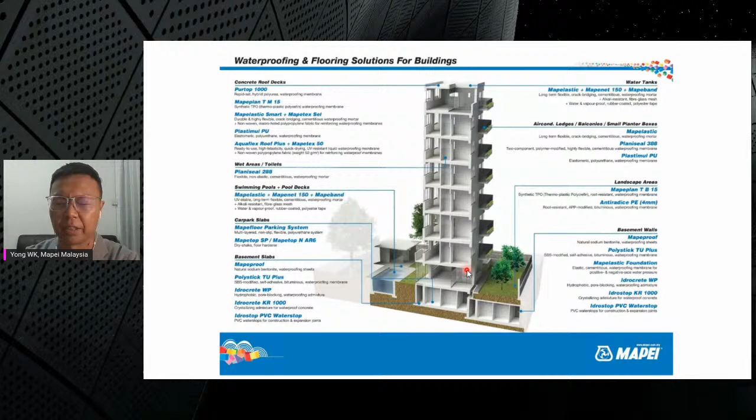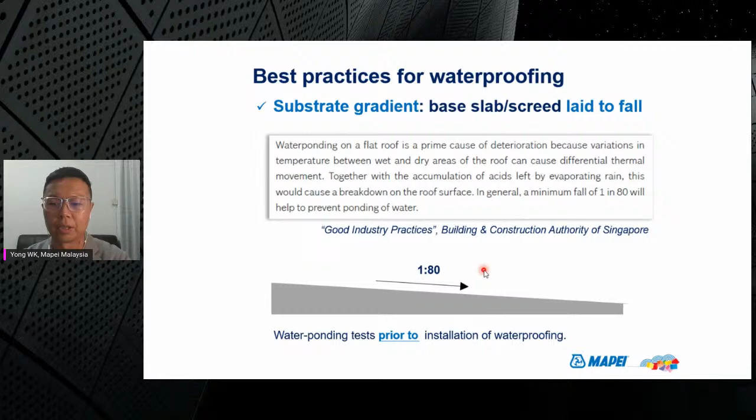So let's take a look at the number one criterion that we need to observe, which is the substrate gradient: the base slab or the screed shall be laid to fall. According to the good industry practice by BCA of Singapore, the roof shall be cast at 1:80. With this gradient, it should be sufficient for the water to flow to the nearest outlets. If this is not so practical in Malaysia, at least we should observe a minimum of 1:120 in our context. What we can do is conduct a water ponding test prior to any waterproofing installation to ensure that there are no water depressions on the substrate. This is a very important first step.

The second step is to look into the substrate condition when using a fully adhered system, meaning a fully bonded system. The substrate must be fully cured, sound, and strong. It should be free of laitance, dirt, dust, oil, grease, coatings, or any contaminants that may affect the adhesion. I always use this analogy: if you're going to stick cellophane tape onto a dusty table, will it stick? The answer is no. So for any waterproofing that we are going to bond onto a substrate, it should be free of laitance, dirt or any dust. This is very important.

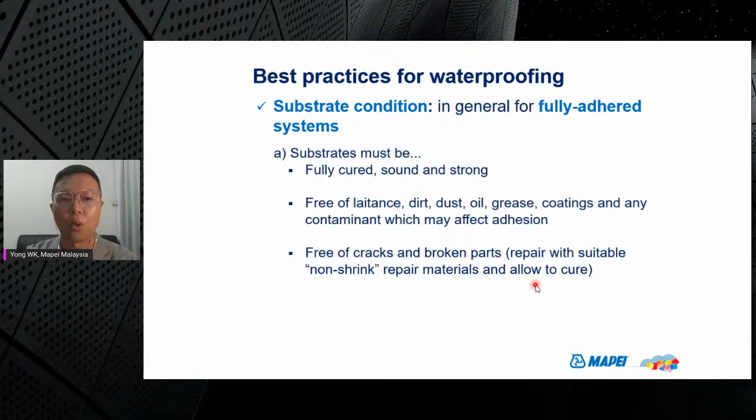We must also ensure that the substrate is free of cracks and broken parts. It should be repaired with suitable non-shrink repair materials. And the keyword here is allow it to cure properly before we apply the waterproofing on top. This is very, very important.

Subsequently, we also need to ensure that waterproofing materials with very high mechanical properties, for example, our Purtop system or a Mapefloor car park system, which require very stringent surface preparation, follow the strict manufacturer recommendations.

For instance, from the diagram below, you can see that for certain cases, we may even need to do captive shot blasting, and on the texture of the surface, we can see here it creates a mechanical key for the waterproofing or the flooring system to bond onto the substrate. This is to ensure that the waterproofing is applied to all this area and fully bonded onto the substrate.

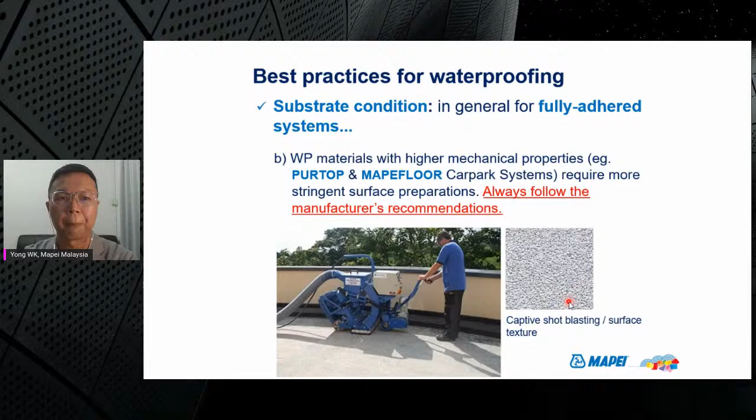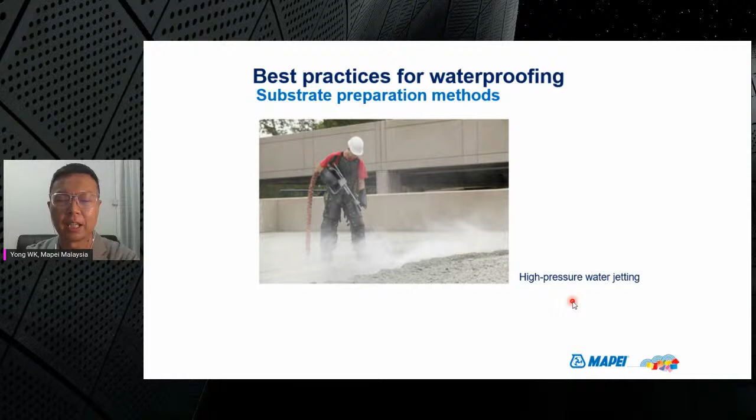And in certain cases, for highly contaminated substrates, we should use high pressure water jetting to clean off all the contaminants that may affect the adherence of the waterproofing onto the substrate.

For non-structural cracks, what we can do is cut a V-groove to 25 mm deep, remove all the loose debris and reprofile them with our epoxy putty, for example, our Adesilex PG2 TG.

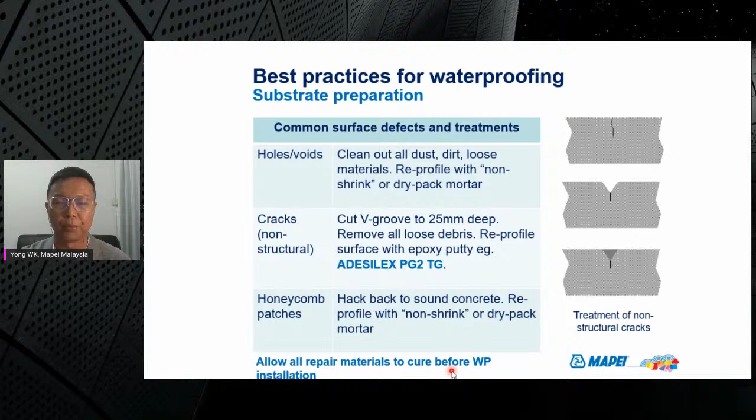For honeycomb patches, we can hack back to the sound concrete and then reprofile them with non-shrink or dry pack mortar. All these repair materials have to be properly cured before the waterproofing installation. This is a very important step that we need to take into consideration.

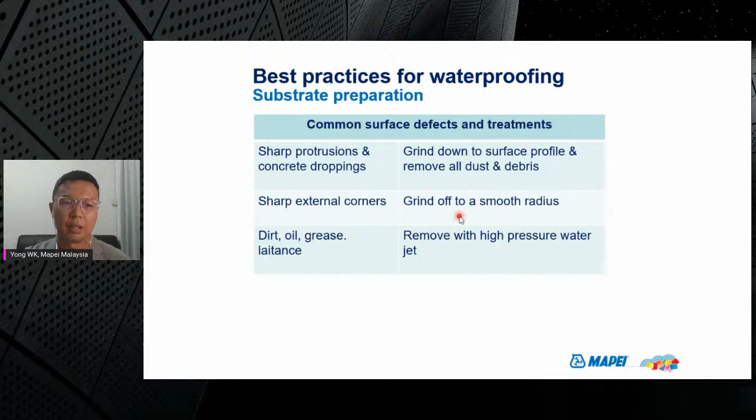For sharp protrusions and concrete droppings, we grind down to the surface profile and remove all the dust and debris. For sharp external corners, grind off to a smooth radius. For dirt, oil, grease, and laitance, as in the pictures we showed earlier, we can remove it with a high pressure water jet.

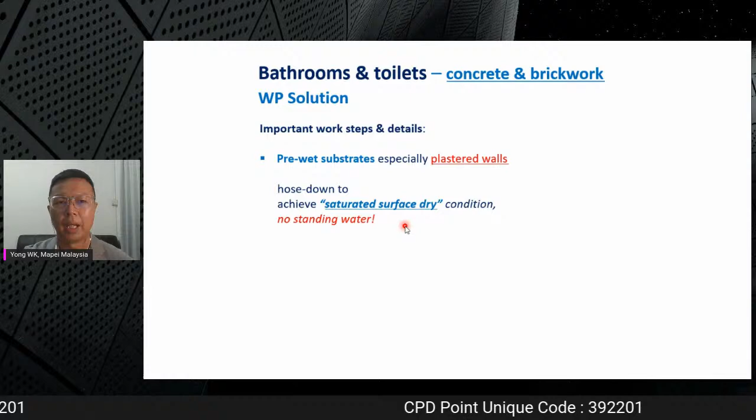For instance, for a bathroom and toilet with concrete or brick wall substrates, what we need to pay attention to is to pre-wet the substrate, especially the plaster wall, and then hose down to achieve a saturated surface dry condition.

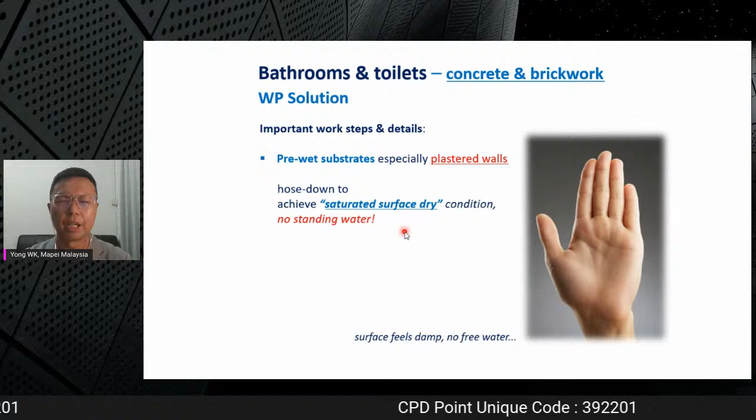What is a saturated surface dry condition, or what we call the SSD condition? That means the surface feels damp, but there is no free water or standing water on top. So after we apply the cementitious waterproofing onto it, it will not be sucked away by the substrate, and it will not interfere with the adherence of the waterproofing onto the substrate.

Next, on the treatment of internal corners, option one: install 25 by 25 mm cement mortar angle fillets. What we can do is mix latex into a 1:3 cement sand mortar to form these angle fillets.

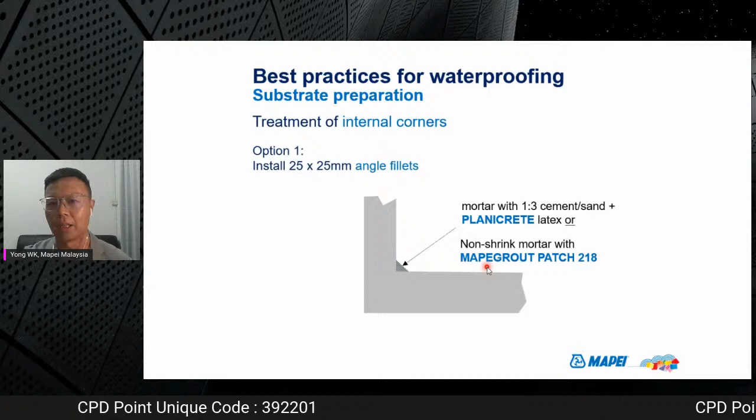The reason we do angle fillets is that we want a smooth radius of the waterproofing on the upturn areas, so that the waterproofing will not crack there if you have sharp corners. Optionally, we can use our non-shrink mortar, like our Mapegrout Patch 218, to fill up this joint here.

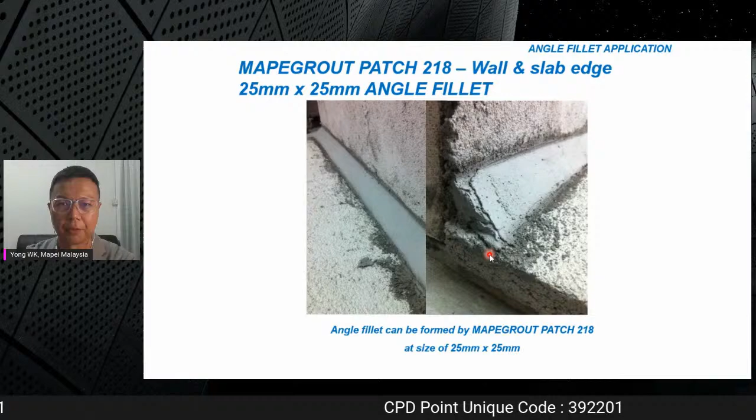So this is how the angle fillet looks. It can be formed by using our Mapegrout Patch 218 to form these 25 by 25 triangular angle fillets. Option 2, you can use our range of Mapeband.

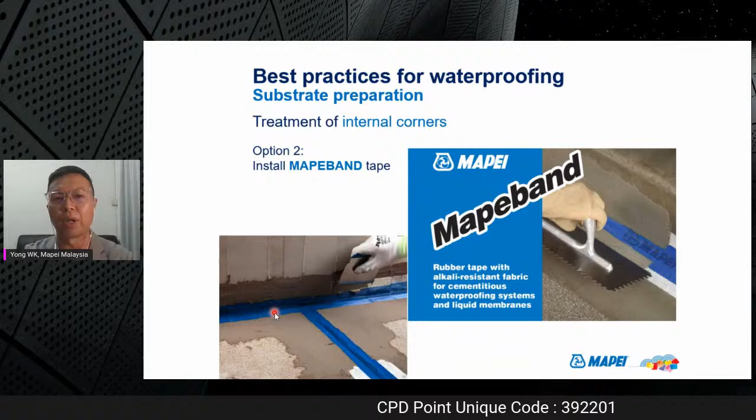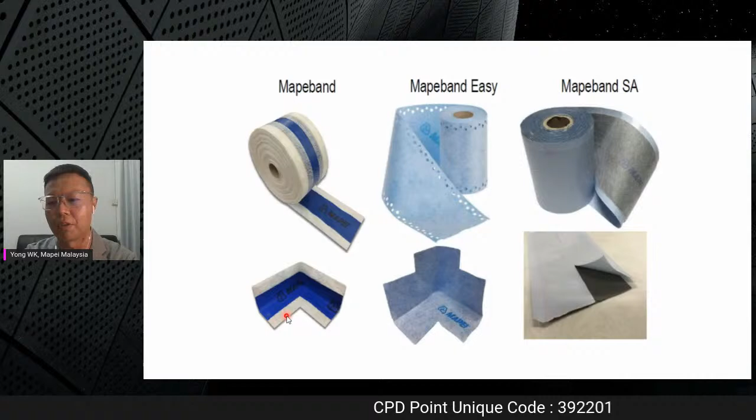So the Mapeband, with very stretchable materials, after you apply this onto the angle fillets, will actually make the joints and sharp corners watertight right away. We have a range of Mapeband, which is Mapeband Easy or Mapeband SA, used in different scenarios. So this is how it looks. You can use Mapeband Easy, or we can use Mapeband SA with a self-adhesive.

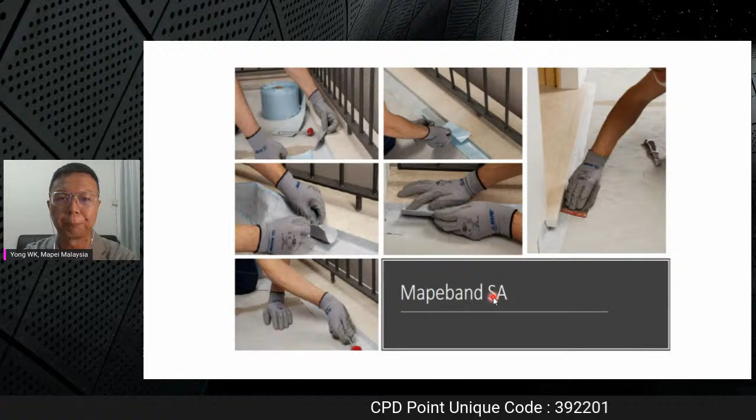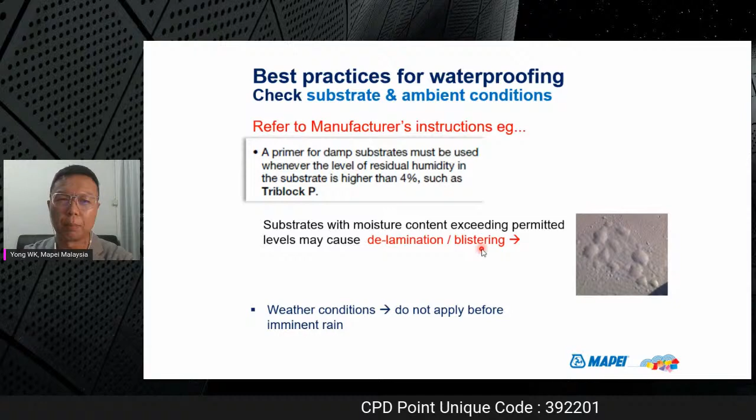For best practices for substrate conditions or ambient conditions, always refer to the manufacturer's instructions. For instance, if the substrate is very damp with a very high moisture content exceeding the permitted level, it will cause delamination or blistering, like what you can see in the picture here. So we can use a primer to solve this issue, or always check the substrate condition, the moisture content inside the substrate. If the weather is going to rain, we don't apply the waterproofing. So observe this.

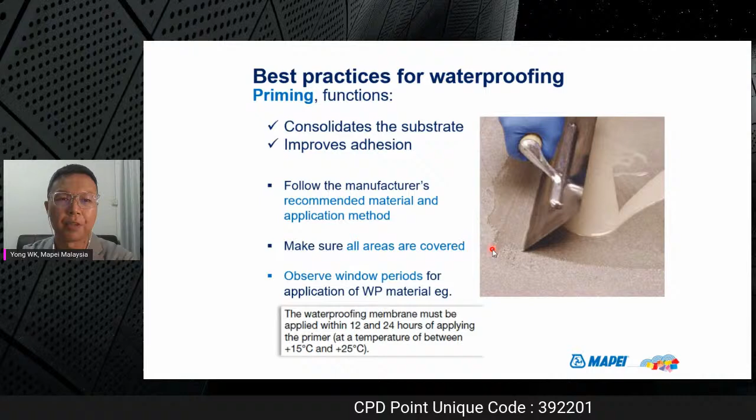Oftentimes we recommend a lot of primers, primer SN or primer MT or things like that. So what is the function of this primer? It is used to consolidate the substrate and also to improve the adhesion of the waterproofing to the substrate. Always follow the manufacturer's recommended materials and application method, make sure all these areas are covered, and observe the window periods for the application of the waterproofing material.

For instance, the waterproofing membrane is applied, as recommended in our data sheets, 12 to 24 hours after applying the primer. If this surpasses 24 hours, we need to reapply it, because it has already surpassed the window period.

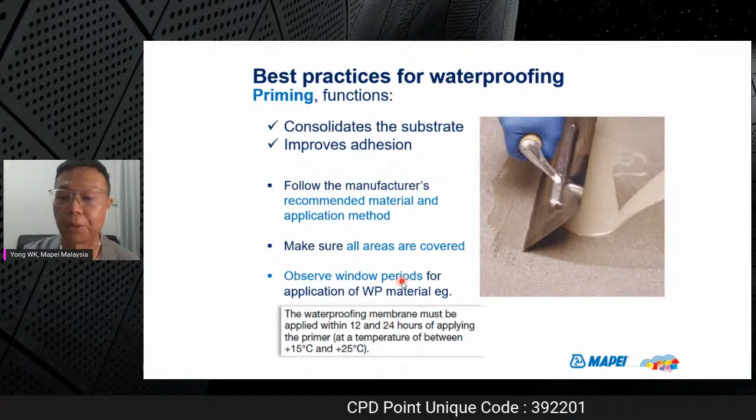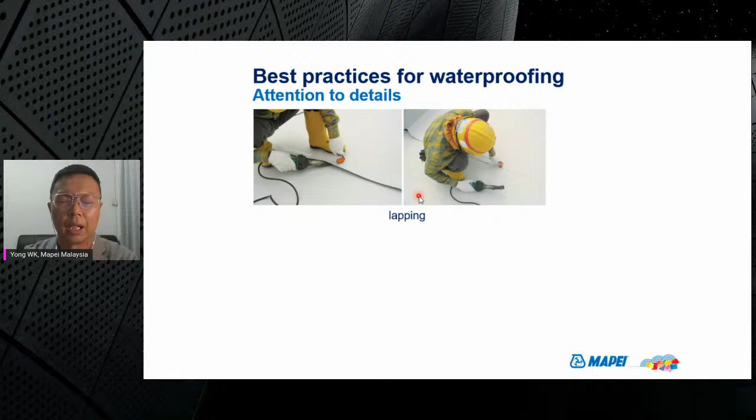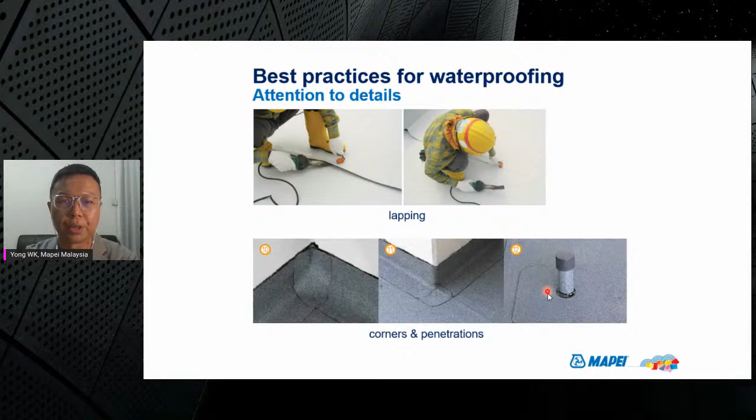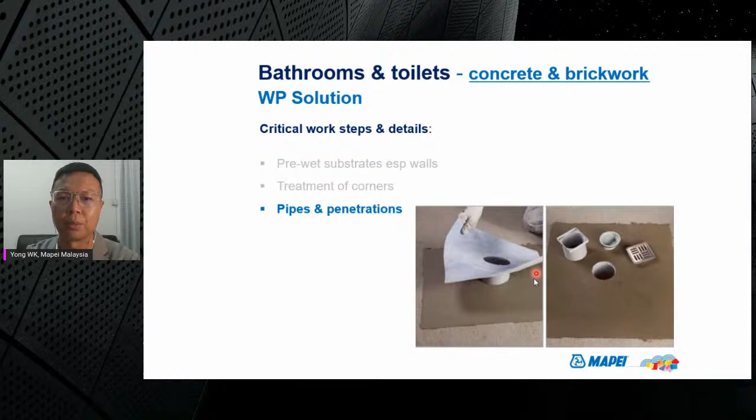For roll-form membranes, like our torch-on membrane, TPO membrane or PVC membrane, we need to pay attention to all the detailing, especially the lapping, to ensure no water seeps through the laps. All the corners and pipe penetrations have to be taken care of to ensure the watertightness of the waterproofing membrane. For pipe penetrations, at MAPEI we have something called drain vertical to ensure the watertightness of the floor trap here. Later, I'll show you the full details of this.

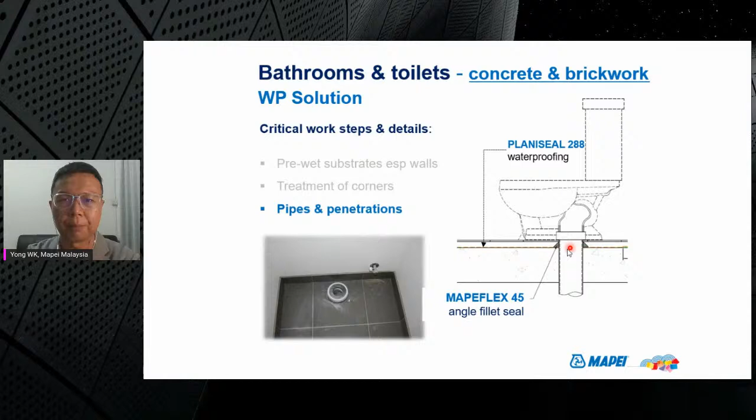For some WC areas, we can treat it with sealants around the circumference of the floor trap or the WC area. These are the simple detailings we need to observe for toilets, especially waterproofing on the cementitious. This is the cementitious waterproofing: our Planiseal 288 or Planiseal 2A or even our Mapelastic.

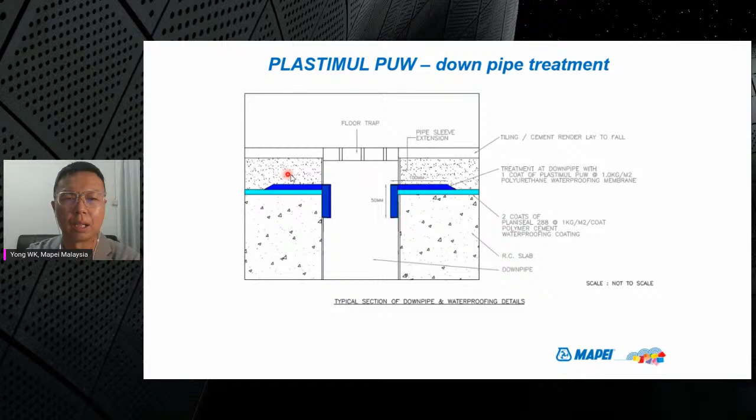After that, we need to apply the PLASTIMUL PUW, a liquid-applied waterproofing coating, over it, with a downturn of 50 mm and about 75 to 100 mm around the circumference of the floor traps. This ensures these areas have been taken care of for watertightness at the floor trap. In actual conditions, you can see it has to be done this way.

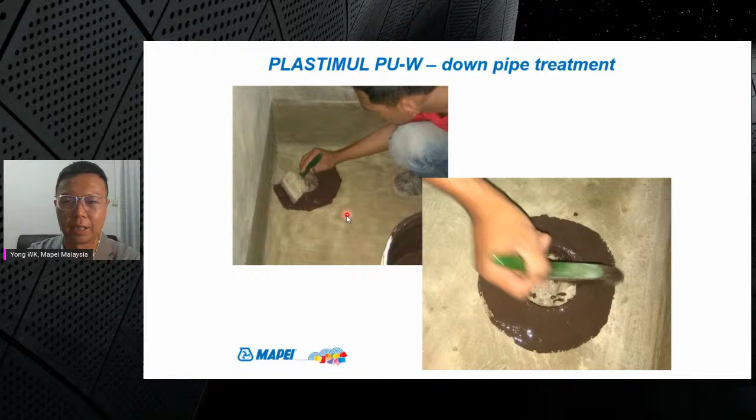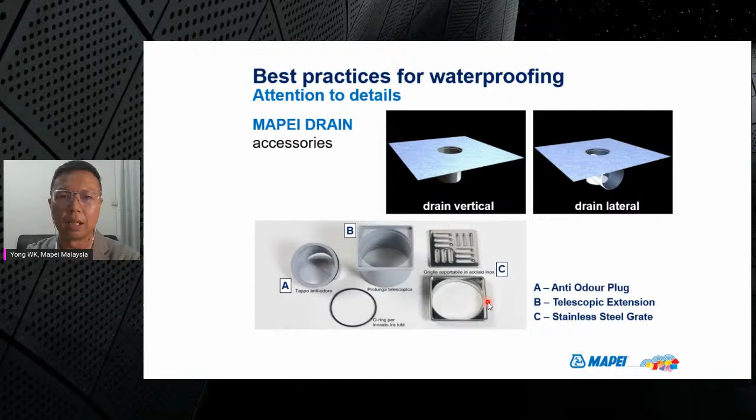Like I said earlier, MAPEI has a range called drain vertical, and also drain lateral. The whole set includes anti-odor plugs and a pipe sleeve that you can cut to suit the screeding level you need. The box also comes with a stainless steel grating to take care of the floor trap area. So this is one whole set available to the industry.

We also need to pay attention to all this detailing, especially where we apply the tuck-in on the upturns and seal it off with sealants, or where we need to do certain lappings. Even for the TPO or PVC membrane, flashings need to be taken care of. All these detailings are available to share with consultants and architects in the industry, so always check with us. We can share the standard detailings we have for each product, since each product has different detailings to observe.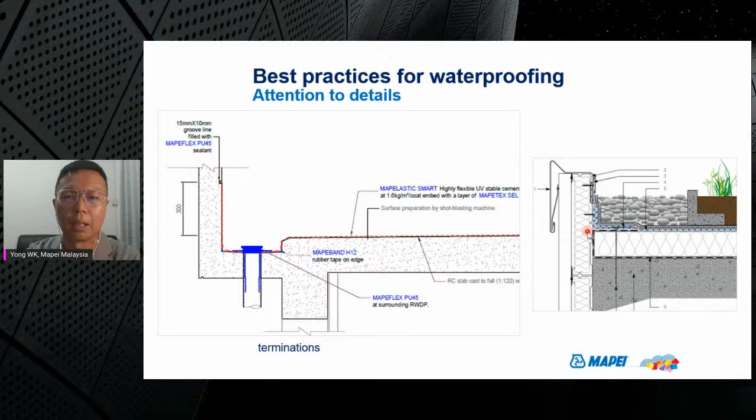And also, we need to respect and treat all the joints. For example, in this case, this is actually a structural expansion joint. What we can do is install a Mapeband TPE tape. Basically, it is tape that we add to ensure the water tightness of the expansion joint. Okay, so we can use this.

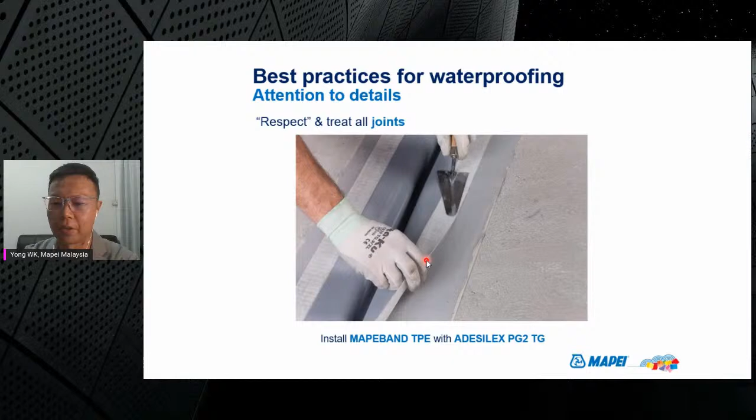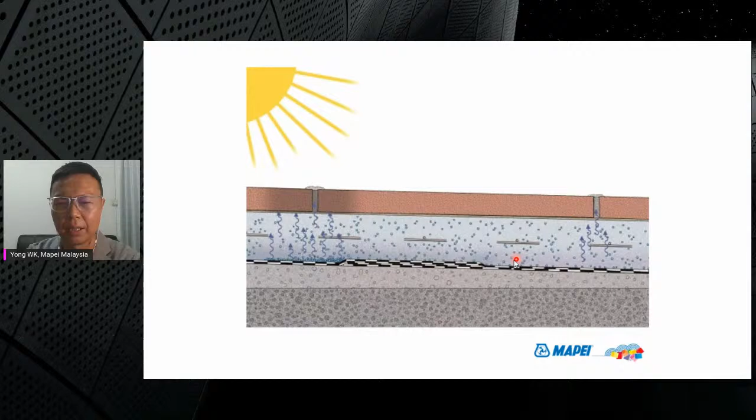Right. A lot of times we hear owners and architects complaining about this. This is actually a phenomenon called efflorescence on the substrate, especially the tile surface. For instance, this is a waterproofing layer, and this is a screed layer. What happens is that if you waterproof the layers on the substrate directly, then screed over it, and then tile over on top, the rainwater is still able to reach down to the substrate. In this case, this is the screed, and it will react with the screed to form efflorescence on top of the surface, and it will look very ugly.

So how do we actually prevent this? We apply the waterproofing layers directly onto the screed. We can also do one layer on the substrate, to ensure that these waterproofing layers serve as protection against the water coming in contact with the screed to form the efflorescence. So this is a very important step, and then we can directly use our tile adhesive to tile over it, and this will ensure that the efflorescence phenomenon won't happen, right?

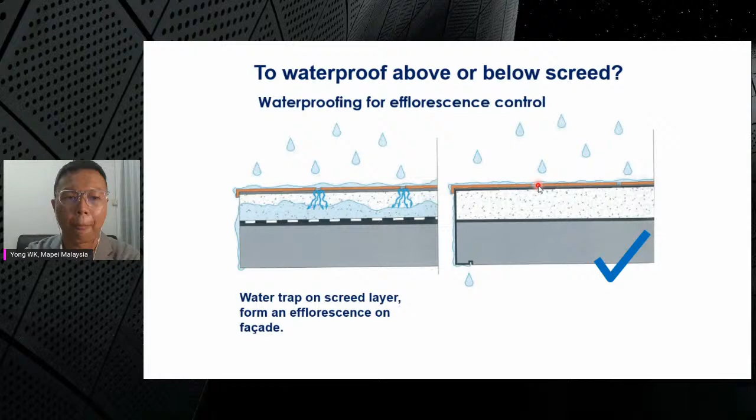So last but not least, we should appoint experienced and competent applicators. Always check with us on the project references, because this is very important. We always believe that if you have world-class products but lousy applicators, you will never get a successful waterproofing system, right? So always check who their project teams are and whether they have done any relevant jobs with these products, which are very special products, especially the spray-on polyurea system that we have in our range. And also check whether they have special equipment and tools to apply the waterproofing system.

Right. For instance, this one is a pure polyurea system, right? So they need to use very special equipment and tools, a spray-on machine, to spray the waterproofing membrane. And also check the financial strength of the applicators. Make sure that they are not a $1 or $2 company, right? They are here to stay and to serve, because they will carry the liabilities of 10 years on the workmanship.

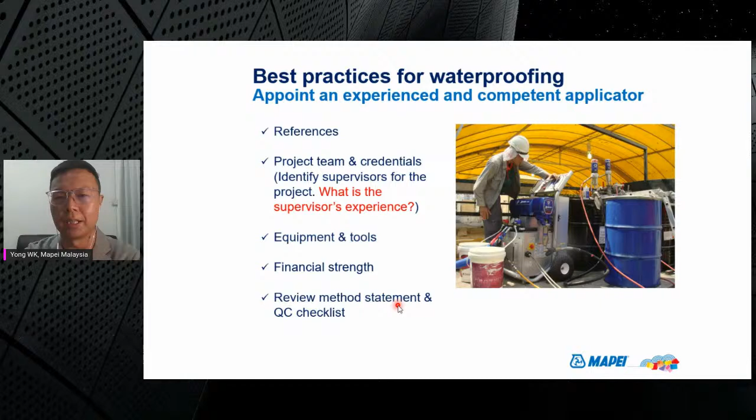Yeah. And it is very important as well to review all the method statements and the QC checklists that they submit to you, just to make sure that they are following what we have already specified, according to the work sequence and steps we spelled out in the data sheets. So this is very, very important.

Right. For care and protection of the works and maintenance, what we need to do, like we mentioned earlier, is protect against the weather and also traffic during the curing period. I would like to give you the example of outdoor swimming pools that we apply. Rightfully, for all these outdoor installations, we should erect a tent during the installation of the waterproofing, and also the installation of the tiles with tile adhesive, to ensure that the water will not interfere with the bonding of our adhesive and the waterproofing system that we are applying.

And most importantly, respect the curing periods of these waterproofings, and do not fill up the water too fast, to ensure that it works. The second point is to use proper footwear to ensure that it will not damage the waterproofing that we have already applied. And do not place heavy objects directly onto the waterproofing surface.

You can actually use plywood, especially when you have a scaffolding that you need to place onto the waterproofing system. Practice regular inspections and maintenance.

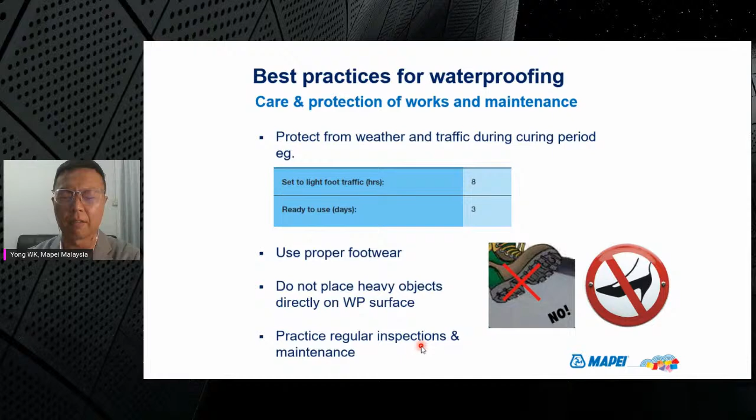This is actually very important in this case, that we need to work together with site personnel, and all parties have to come into place to ensure a successful waterproofing system.

Protection of the applied coatings and membranes. Especially when you have waterproofing applied on the bitumen onto the RC retaining wall, before you backfill it, we need to apply a polystyrene board or even a drainage cell to protect the waterproofing before backfilling. For example, this project that we have done, this is the KVMRT Bukit Bintang station.

After spraying of the membrane, this slab is actually the roof of the KVMRT station that we have. So after spraying of the membrane, we need to put in the polystyrene board before the backfilling, to protect the membrane directly.

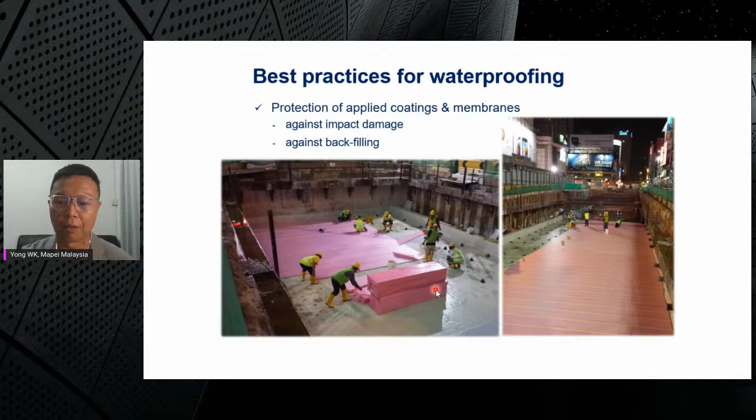That's all for me today.